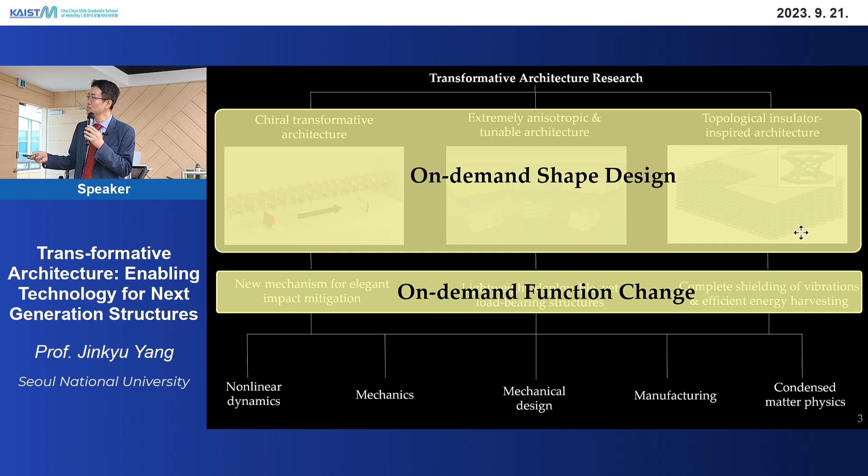But all these topics are based on on-demand shape design, which is connected to on-demand function changes. For that, I'm going to use different disciplines, for example nonlinear dynamics, mechanics, etc. So the first topic will be about a structure where I'm going to leverage nonlinear dynamics.

Impact mitigation is a very important subject in aerospace engineering and other engineering fields. This is a video of Falcon 9 from SpaceX, known for its reusable rocket motor - it can be used again and again. But when it's being landed, we have to make sure the structure is safely guarded, otherwise this can be catastrophic. So when it's landing we have to make sure it's safe.

If you think about a typical landing structure, when it touches the ground there will be a large amount of impact applied at the bottom. So people typically do use, for example, this type of metallic foam, which is inserted so that when impact comes in, we minimize the energy transmitted to the main body. This is the typical approach.

But using transformative architecture, especially leveraging nonlinear wave dynamics, I'm wondering if we can convert this impact into tension. That means if this structure is landing on the ground, instead of compression transmitted to the main body, it will be tension. Can you picture that? For instance, if you're wearing a helmet with this capability, when something hits the surface, instead of the inner part pressing your skin, it will basically pull your skin - meaning you won't feel any impact. So this conversion of compression to tension - is it possible?

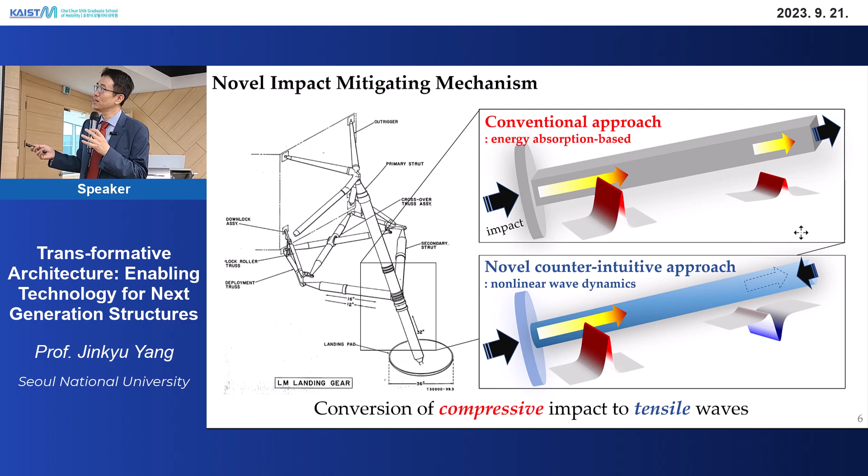It sounds a bit counterintuitive, right? Can it really happen? So I'm going to explain the prototyping process and the actual phenomena, then I will return to the physics behind it, okay?

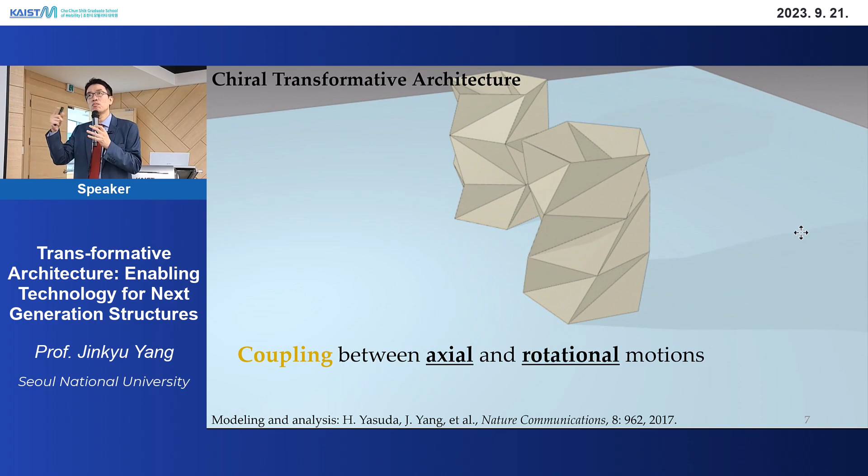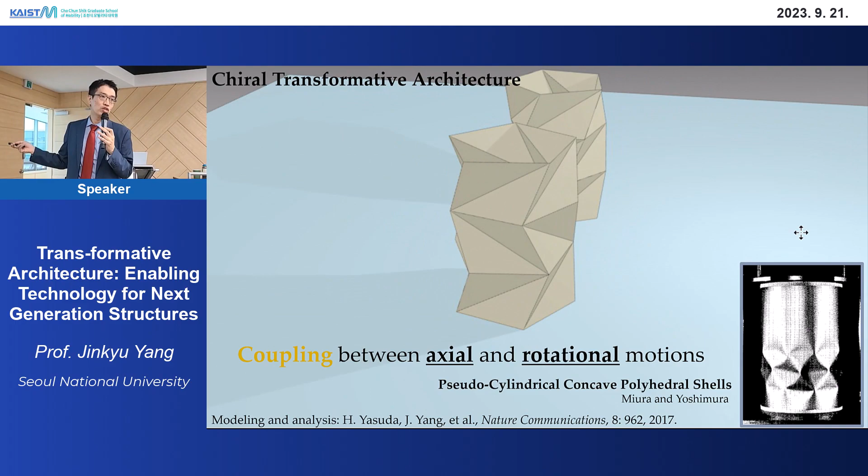For this purpose, I used chiral transformative architecture. This is like an origami structure which, under compression, has coupled motion of compression and twisting. This type of pattern can be easily found, for example, when you have a very thin-walled cylindrical structure. If you are buckling it, you have basically triangular shapes on the surface, but if you are compressing and twisting it at the same time, you get this type of chiral architecture.

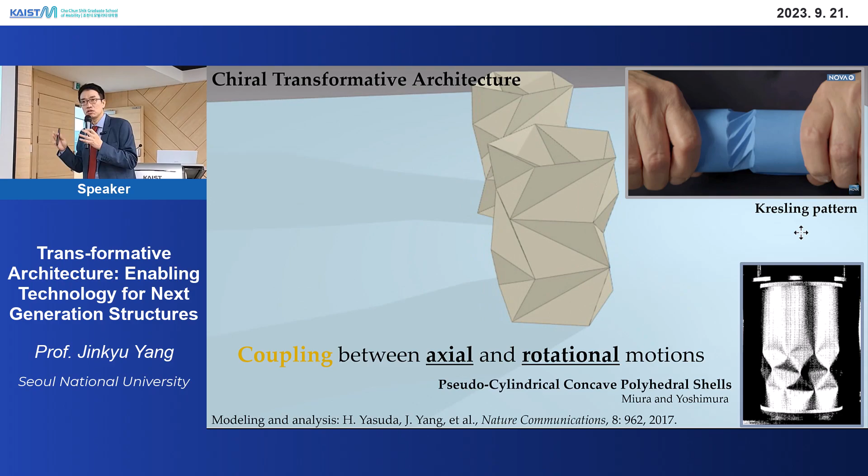Analysis on this can be a bit complicated, which you can look up in references including this, but in this presentation I will just talk about the phenomena, okay?

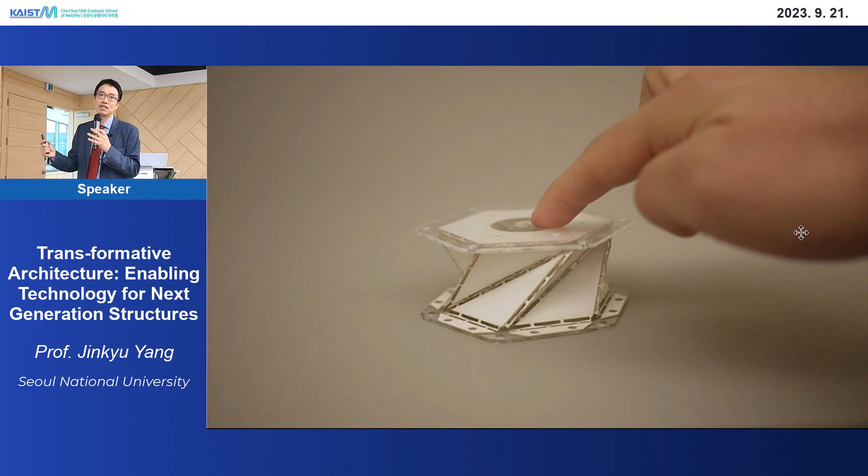To fabricate this, we use a laser cutter and basically fabricate a single unit cell, which is elastic. Under compression, it also has rotational motion. What we do is connect it into a single chain. We have 20 cells.

On the left-hand side of the structure, we have a very strong vibration shaker. We apply a high voltage signal, and it basically applies a strong impulse to this system.

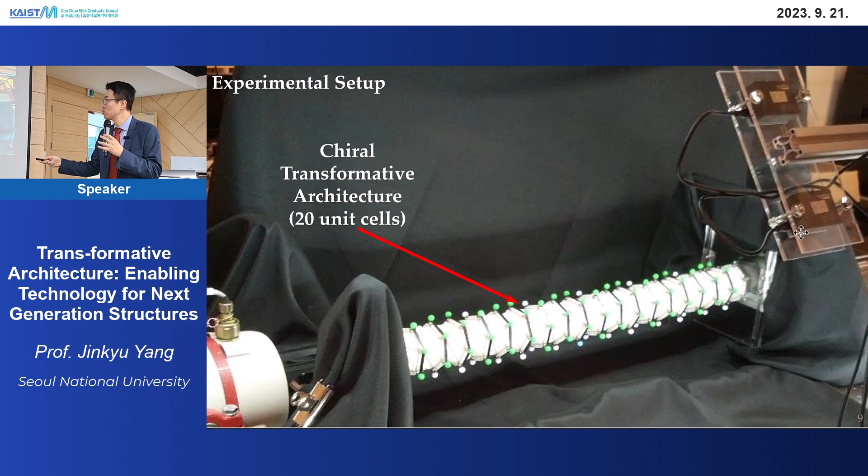We have 6 GoPro cameras. If we have 2 cameras looking at one object, we can get a 3-dimensional coordinate of the object, so each pair is measuring the dynamics of 1/3 of the structure. These balls are basically for keeping track of the motion of this structure.

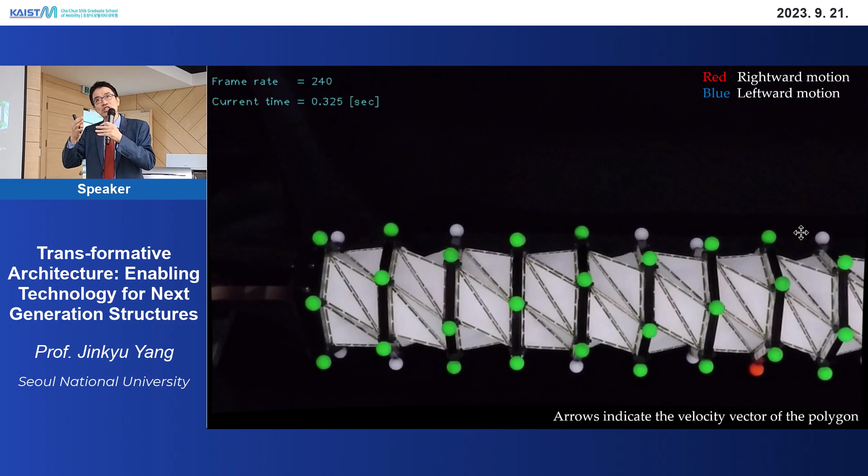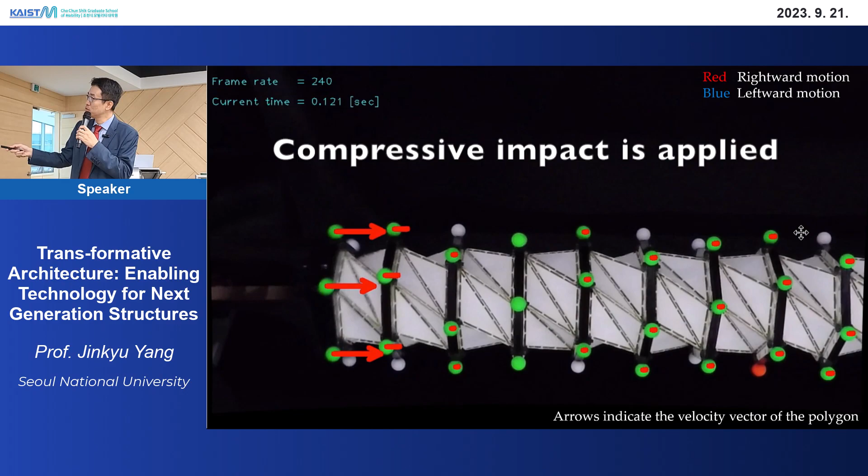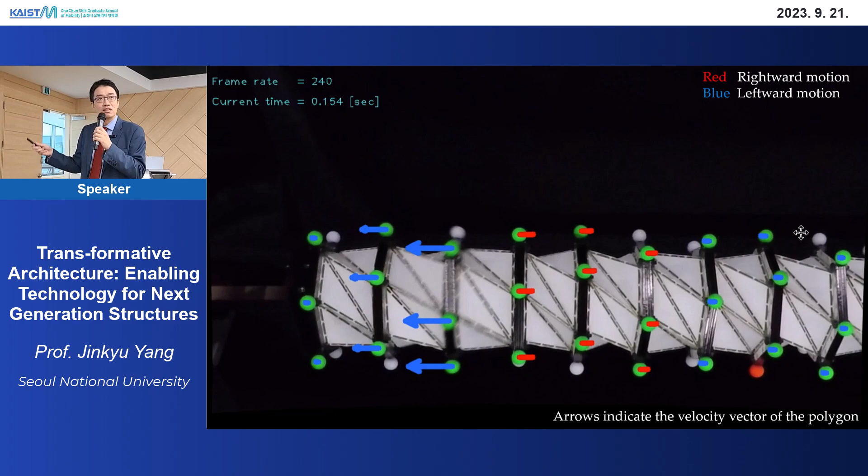Any elastic structure under deformation tends to bounce back, right? So it's compressed at the beginning, but it tends to bounce back. That's why we have these blue arrows generated. But interestingly, red arrows disappear very quickly, while blue arrows are transmitted in a more robust way.

This is an animation based on experiments. This is not just simulation, but experimental results. So what's happening is, again...

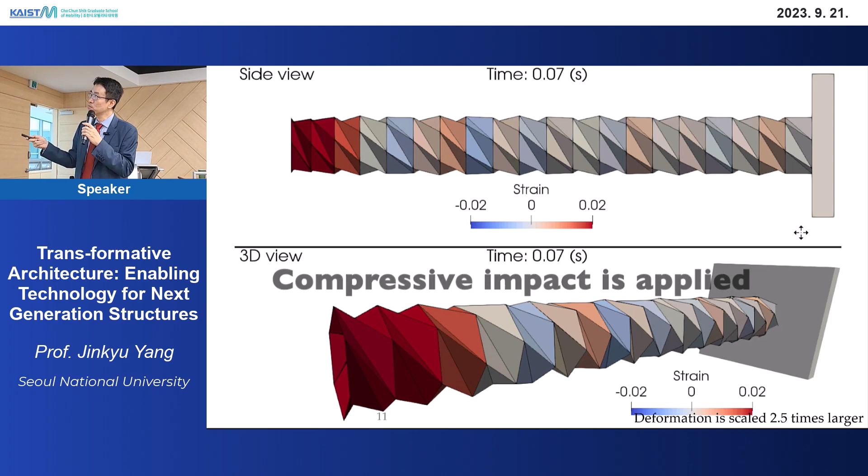Red color is compression. When the impact comes in, this is compressed, so the impulse is transmitted, but due to the reaction, we have blue color following. What happens is the speed of the blue color is faster than the red color. So at the end of the structure, please watch carefully which color arrives first.

Is it red or blue? It's predominantly blue color, right? That means even if you've applied impact on the left-hand side, what you feel from the right-hand side is not the compression, but the tension.

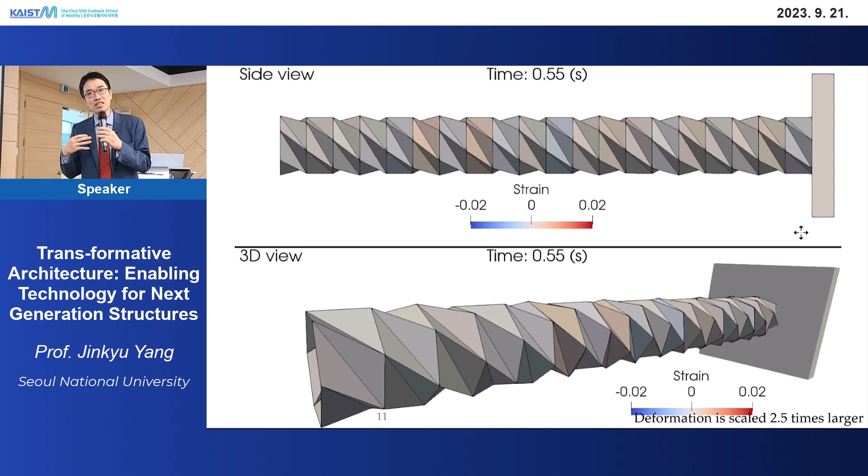But the blue color is propagating in a very robust way. So at the end of the structure, you feel blue, not red. This is the so-called rarefaction solitary wave, and this is based on the overtaking of this blue color wave over the red one.

So at the beginning of the presentation, I said I'm going to convert compression to tension, but what's happening is actually compression is still there, but made dispersed, spread out. But the blue color - we are going to make the blue color propagate robustly, okay?

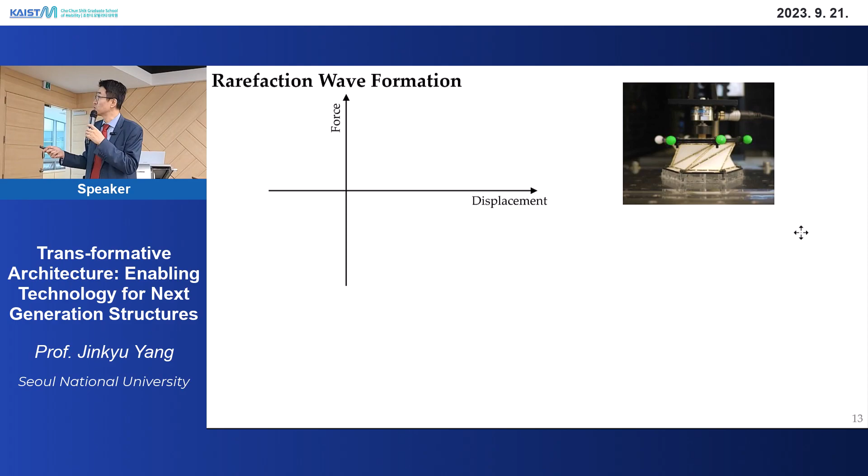So the physics is fairly simple. Let me explain this using a very simple explanation. Under compression of this single unit cell, we have a force-displacement curve, but this is not linear - it's nonlinear. The slope of the force-displacement curve represents the stiffness of the structure. At the beginning of compression it's fairly difficult to compress, but as you compress more and more, the slope goes down and down, so it gets softer and softer. This is nonlinear material.

So what happens is, typically stiff material tends to propagate waves faster, while soft material has a slower wave propagation speed. So if you have this type of impulse with the low amplitude part, and the high amplitude part having a low slope, that means it's propagating slow.

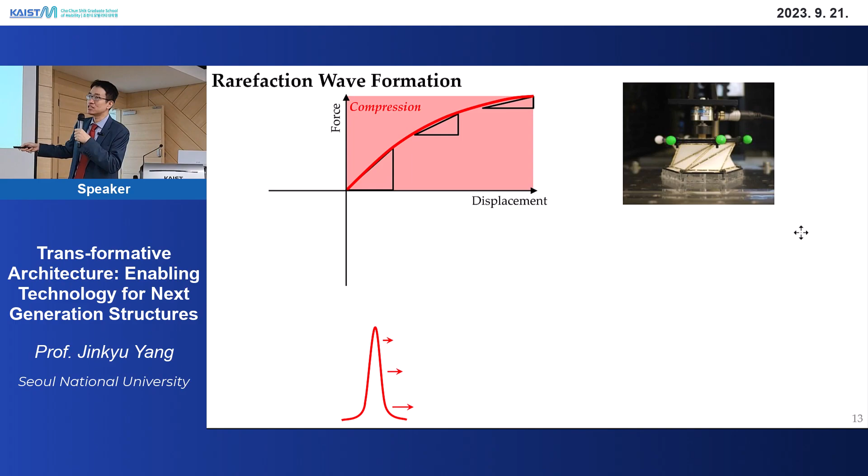Low magnitude part is having high slope, which is making waves propagate faster. So as it propagates along the chain, the system gets dispersed. So this is an efficient way to disperse waves.

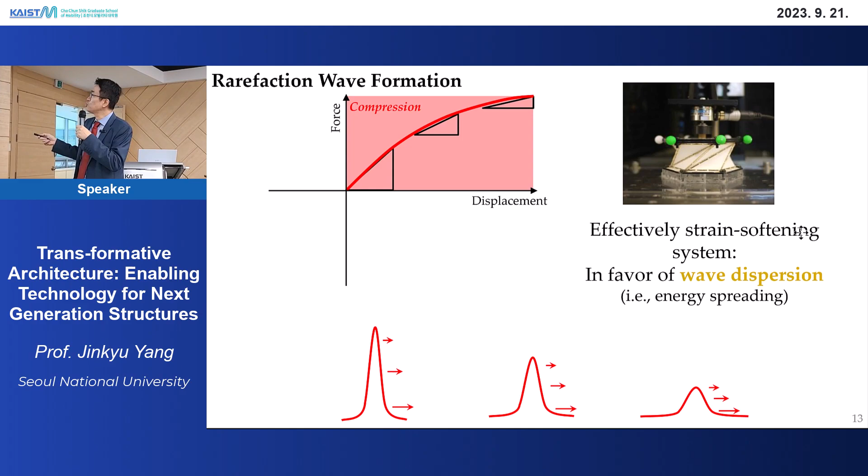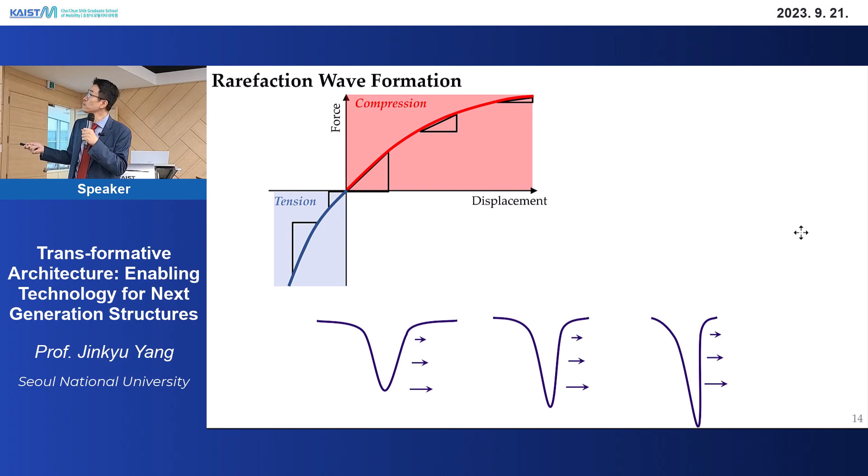But if you think about the other domain, which is tension, this is the opposite. At the beginning, low tension means low stiffness. But if you have higher tension, stiffness goes up, making the wave propagate faster. This helps waves build up to create shock type nonlinear waves, helping wave localization.

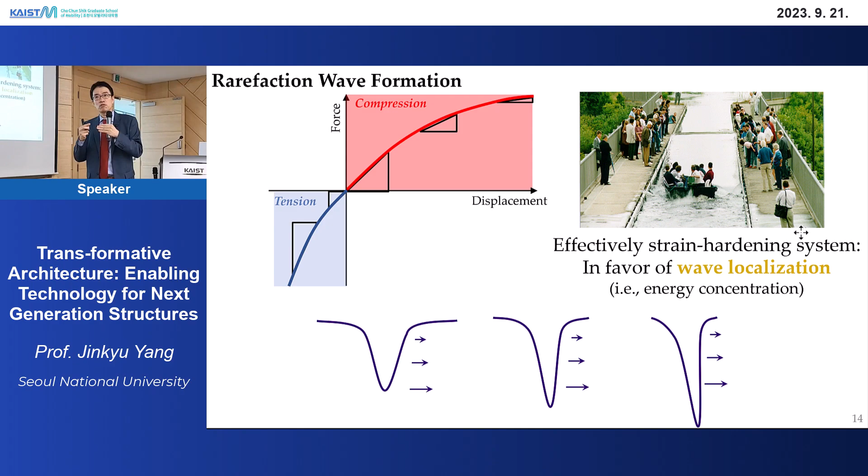And this happens a lot in fluids. In fluids, you see nonlinear waves, like solitary waves, a single pulse wave propagating very robustly. But you also have, for example, tsunami type waves. This happens a lot in fluids because fluids are nonlinear, but typically in solids we only use the stress-strain curve in a very small domain.

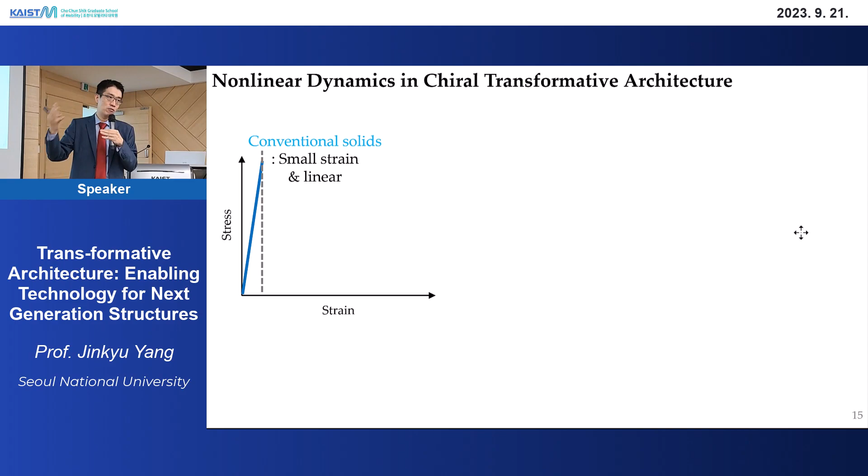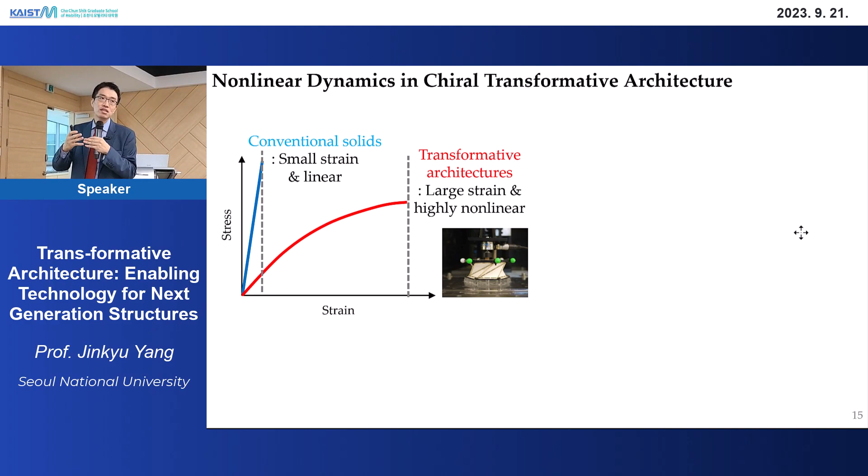Typically, Young's modulus is good enough to explain most wave phenomena. But this is origami - we are leveraging the full domain of strain, which is nonlinear, so we can leverage the nonlinearity of the structure. Just like nonlinearity is used to create nonlinear waves in fluids, this is structure, but we can still create nonlinear waves because of this soft nature. So we can also derive equations very similar to classical wave theory equations, the so-called KdV equation.

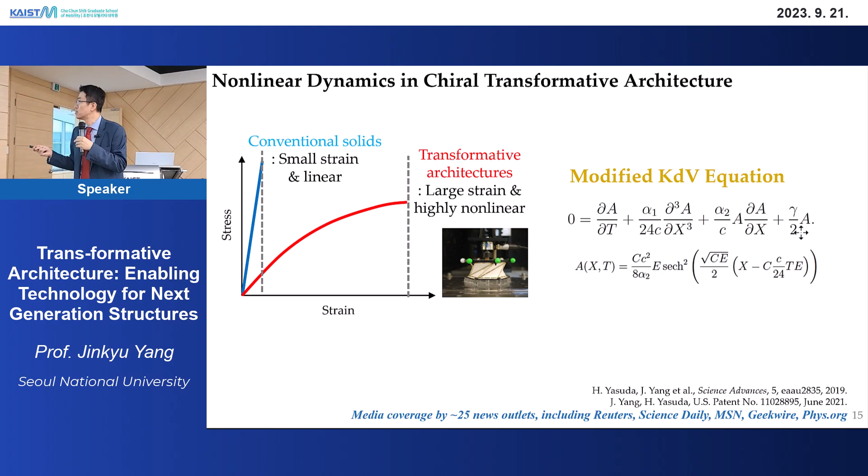This is the KdV solution. So this is what we did with the transformative architecture as the first part. We used it to enable a soft structure. In that soft structure, we created nonlinear waves. That was our first part.

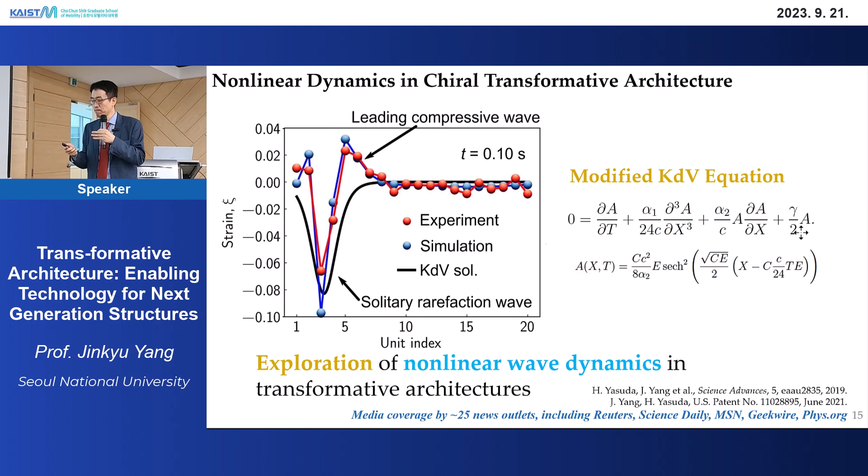But this way, by making composites in an origami way, we can make it pseudo-ductile, which means under impact, the structure collapses layer by layer, so it can absorb a lot of energy. Second, we can also use filament winding, which makes it less expensive to fabricate.

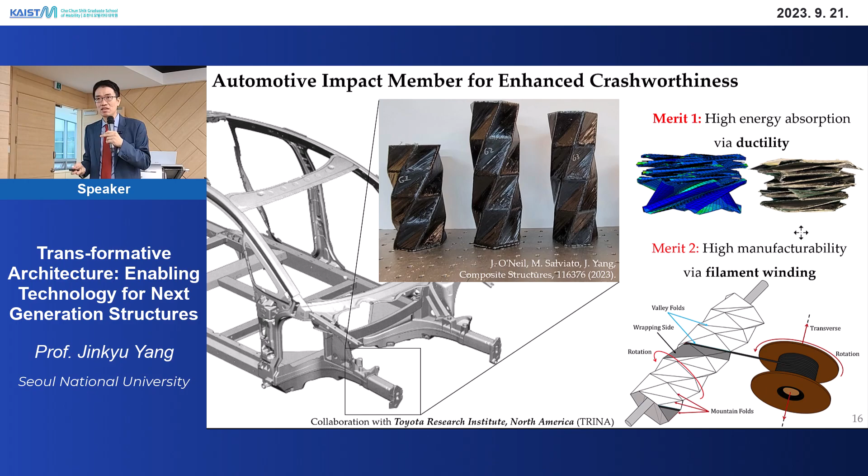So this is a video clip that shows impact of origami. As you see, the structure collapses layer by layer. This way energy absorption can be improved.

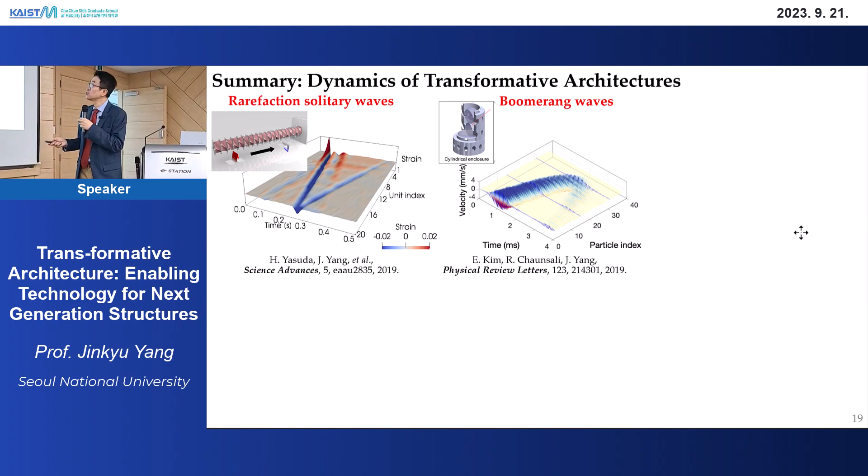All right, that was my first part of the talk. Summarizing, I've shown rarefaction waves, and likewise we can also make waves turn around like a boomerang. You impact on one side, and not even before reaching the end of the structure, we can make it turn around - that's also by using nonlinear structures and nonlinear wave dynamics. We can also make 3D printed lattices, and this enables you to create many different types of waves.

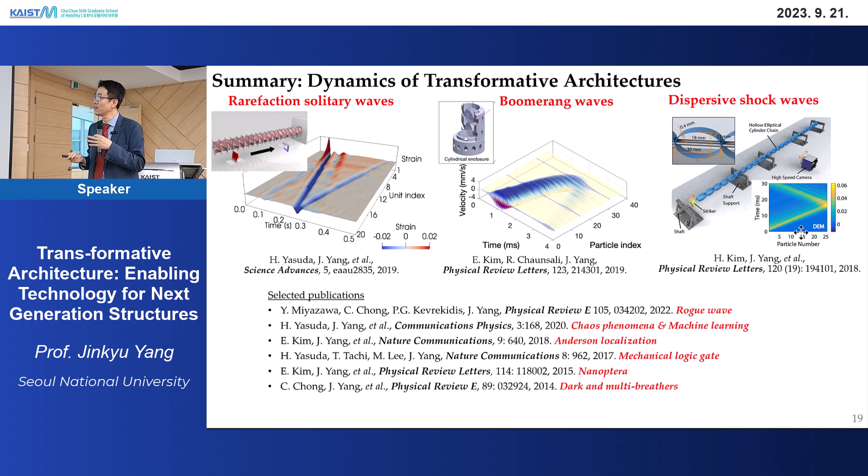All right, so let me move on to the second part, which is anisotropic and tunable architecture for making lightweight, deployable, yet load-bearing structures. So I said three different properties: lightweight, deployable, yet load-bearing. Typically, to make lightweight and deployable structures, the structure needs to be very compliant, very easy to be folded.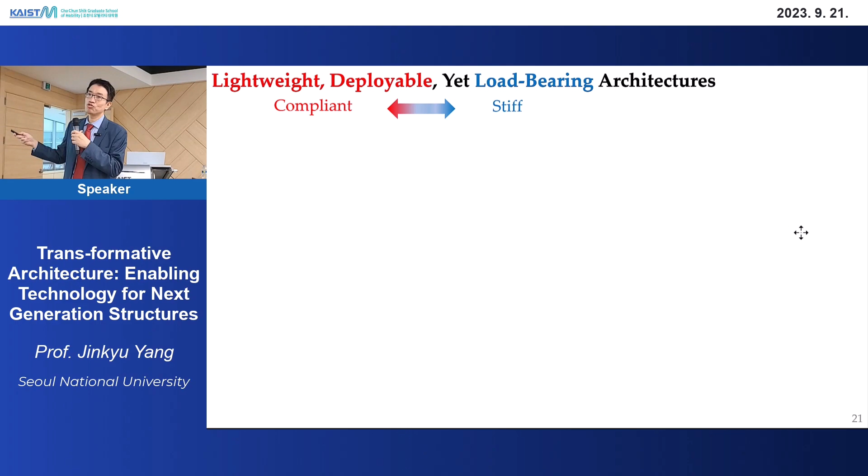But if this structure needs to be load-bearing, the structure needs to be stiff. So we are talking about two different contradicting properties. But this is important in many cases.

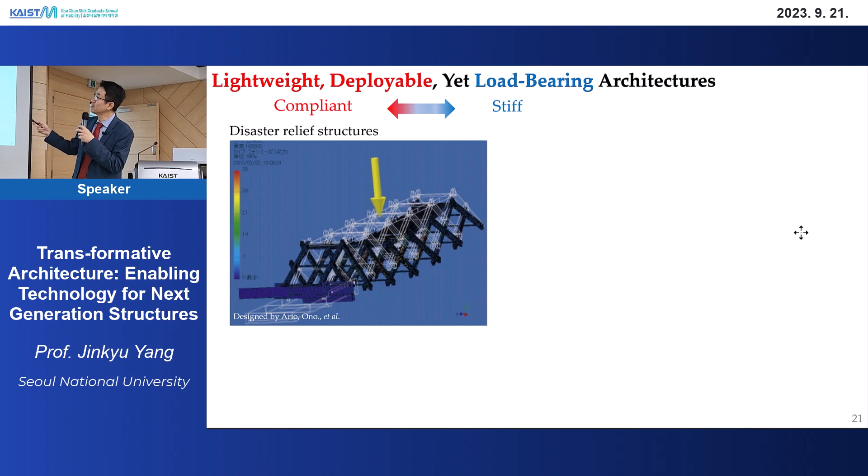For example, when you have disaster relief structures, typically this structure needs to be stored in a compact manner. Under the disaster situation, it needs to be deployed. So this type of structure needs to fulfill these properties. Likewise, when you build a space habitat, you launch the structure in a compact manner, and on a different planet or elsewhere, it needs to be deployed. After deployment, the structure needs to be stiff and strong.

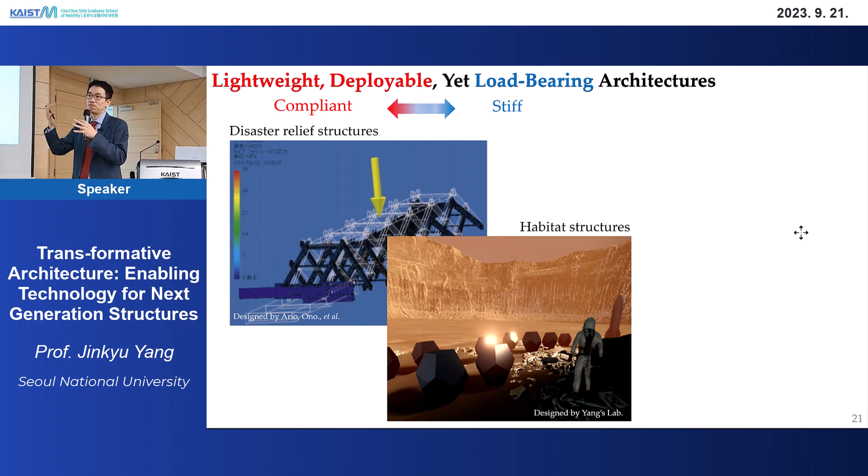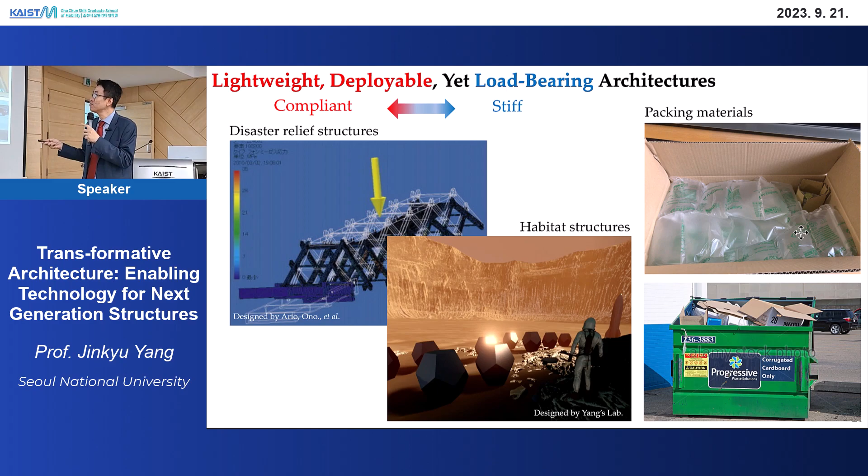Likewise, in your daily lives, packing materials like this need to be folded - stored in a compact manner. At the same time, these boxes need to protect materials, items inside. So there are many cases where you have to fulfill all these requirements.

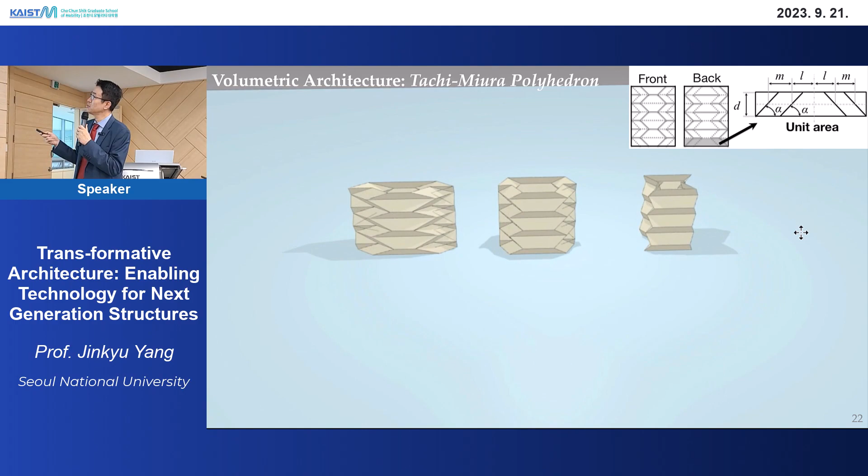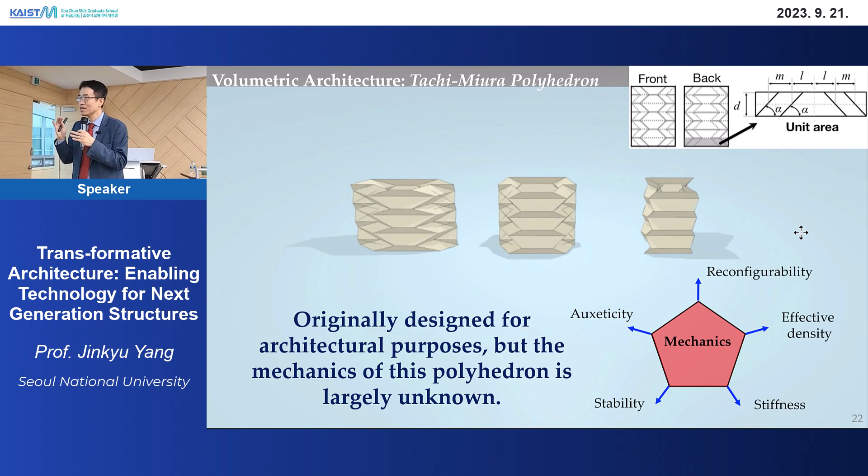So how can we do that? We are proposing origami, particularly something called Tachi-Miura polyhedron. This is just a combination of two different sheets of paper, but this structure has different Poisson ratios, different stability, different stiffness—a lot of different properties that you can actually tailor.

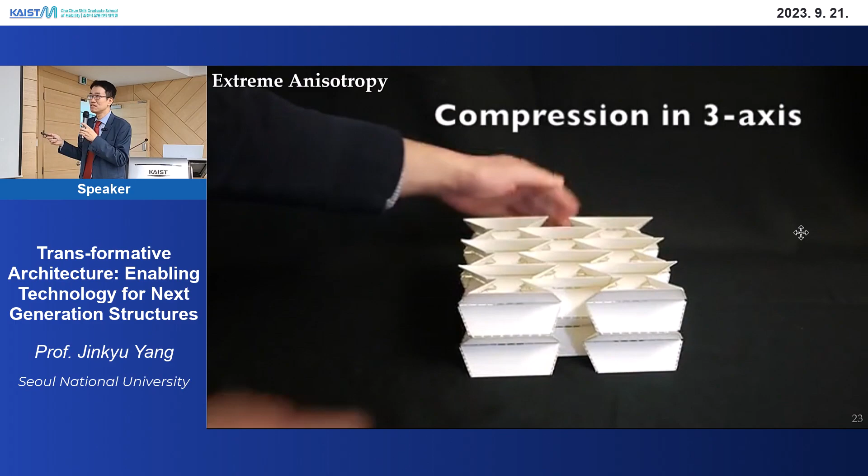I'm not going to get into detail, but mechanics of origami is a very interesting part of the mechanics subject. In this case, I can make this into tessellation, which means multiple cell structure. You see that this is easily compressed, but at a certain direction it can take the load. But even in that certain direction, I'll show you what happens—if you slightly change the initial condition, this structure can become collapsible.

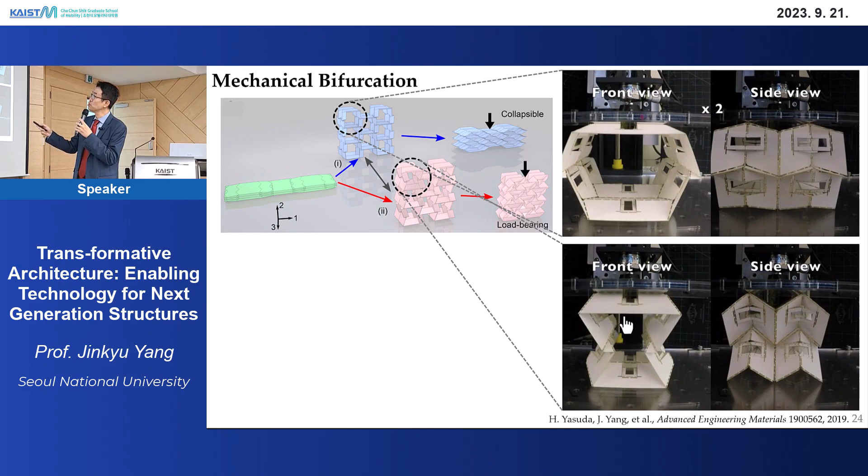Let me play the video. So one structure is easily collapsible, the other structure is load bearing. But I'm talking about the same structure. Depending on its initial condition, whether this is concave or convex, one structure can be collapsible, the other can be load bearing. In terms of force displacement behavior, it's quite different. When we measure the force this structure can handle, it can be very low in this configuration, but when converted to the other configuration, the load it can carry is very high. Very simple principle, but by using this, we can make the structure easily foldable while still able to take the load.

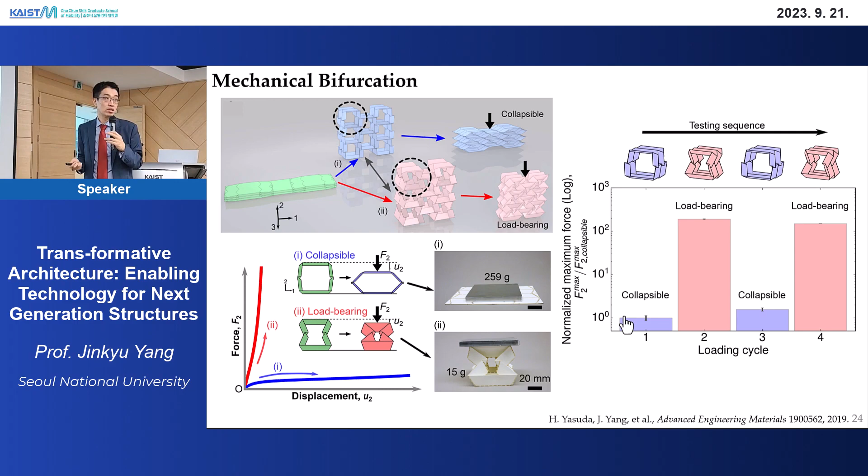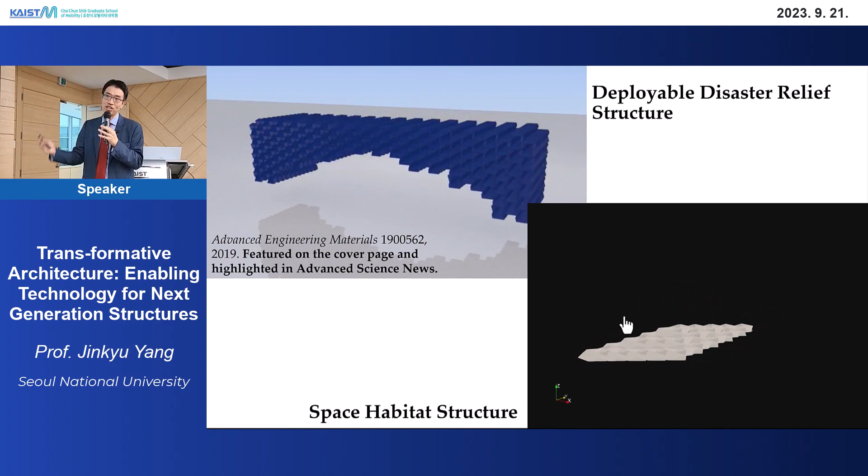Nothing complicated. So using that, we can build disaster relief structures like this. This is based on Tachi-Miura polyhedron. We can potentially make this into a space habitat or different architecture.

Again, this can be made into tessellation. This one has many different properties that you can dial in and tailor. Depending on what you need, you can have specific Poisson ratio, specific density, specific stability that you want. So origami gives you a lot of design freedom.

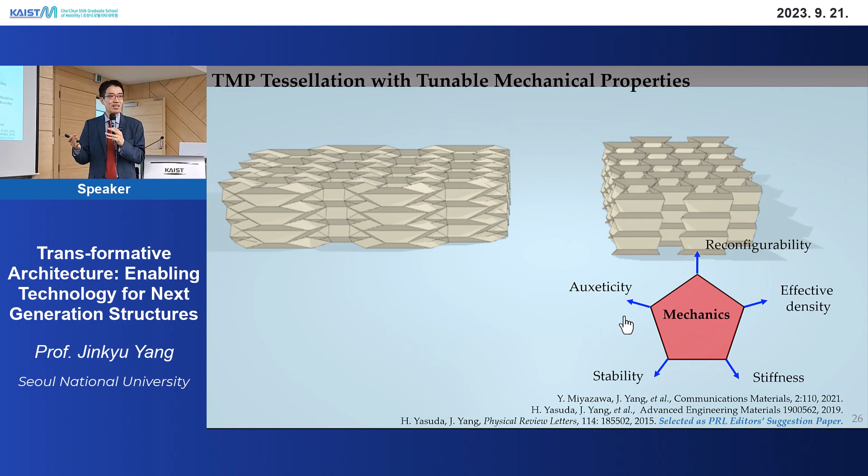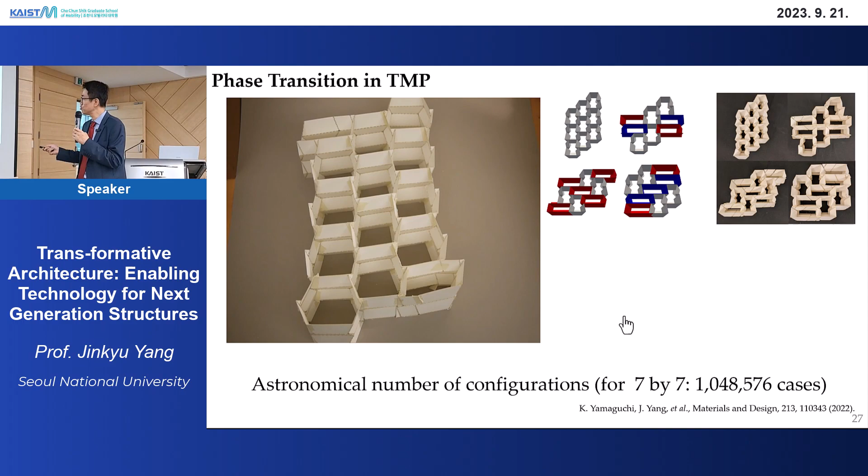Another interesting property is that this structure can be reconfigurable. The whole structure can be made into many different shapes. For example, with 3x3 cells, we can make it into many different geometries. If you have 7x7 cells, it enables you to achieve about 1,000,000 cases. But it's interesting how you can actually calculate all those cases—this is computationally a very interesting problem.

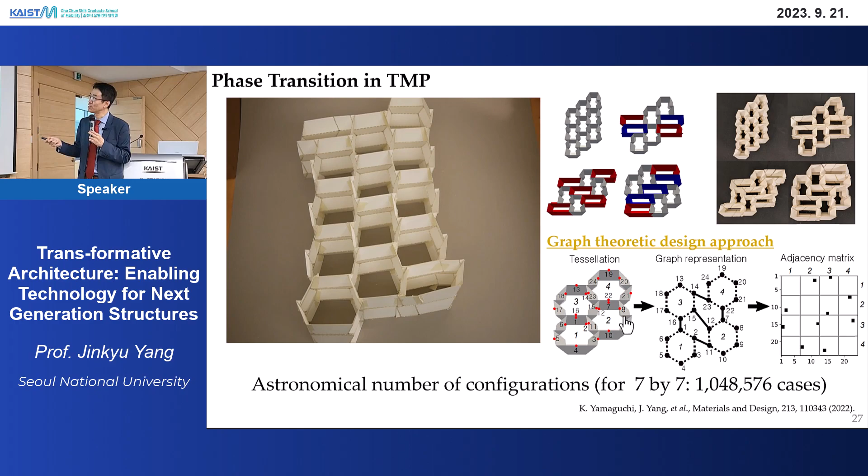So we have used graph theory, which is a tool that many different fields use, including mathematics and computer science. Using this, we can calculate how many cases are possible using this tessellation. Another way we can leverage this is a 3x3 cell structure, which can be converted into many different geometries. This is only showing 4 different cases, but each has a different geometry.

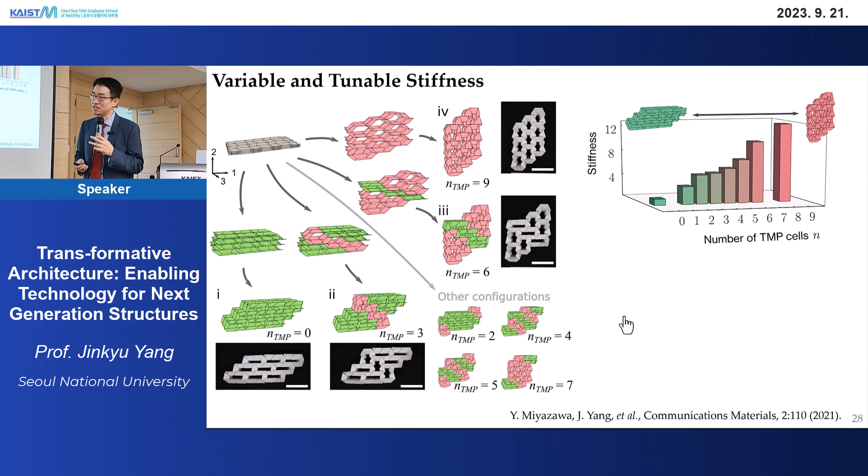For example, this one has 9 square shapes. This one has 6 square shapes and 3 rectangular shapes. Depending on that, this structure will have different stiffness when compressed from the top. So that enables you to have different stiffness, which means this origami system can give you a variable stiffness system. Likewise, the entropy of this structure also changes.

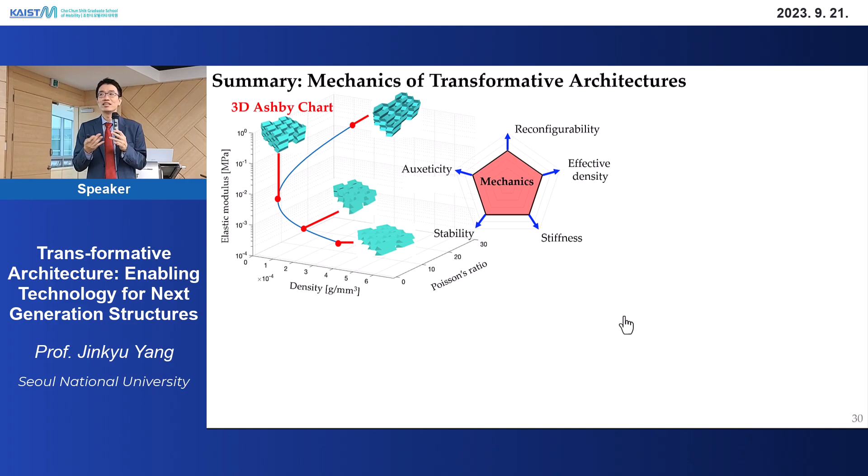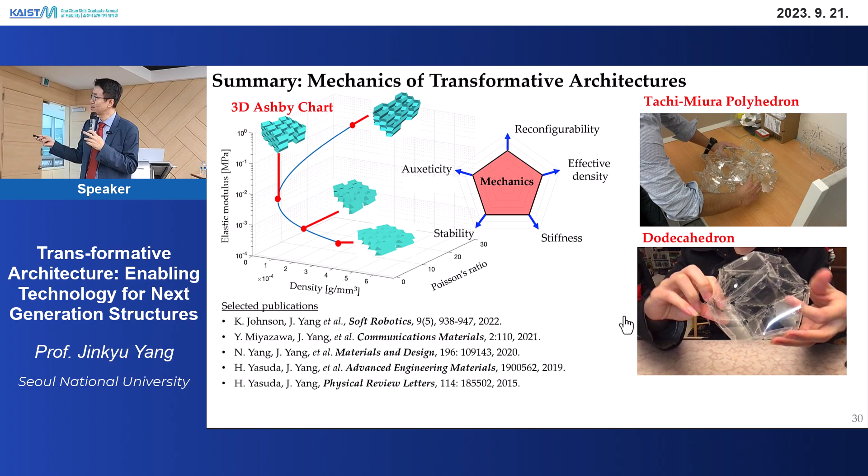Summarizing what I've presented in the second part: origami can give you an interesting design tool that enables you to change material properties—in this case, Poisson's ratio, density, and modulus. We can build it into a prototype, and here is another example, a dodecahedron, which can be deployed into this interesting polyhedron. I'll talk about this a bit more at the end of the presentation, but again, this is an interesting design tool that you can use.

All right, so let me move to the last part, which is topological insulator. How many of you guys have heard of topological insulator?

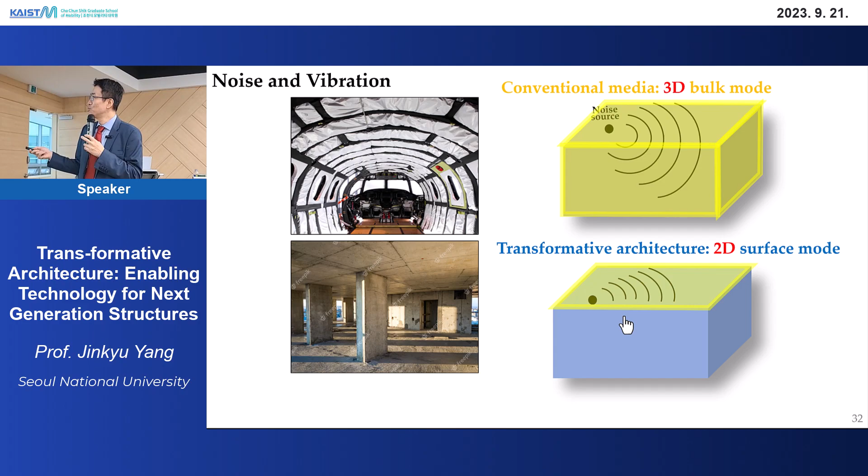In a typical structure, when there is a noise source, waves propagate everywhere. But if you have a new type of structure with the source of noise on the surface, what if the structure doesn't allow waves to penetrate inside? Then you can actually have a very quiet aircraft. You can have basically complete shielding of noise between floors, right?

That is possible if we borrow a concept from topological insulators, okay? So that breakthrough happened in condensed matter physics.

So topological insulator is a material which is insulating inside, conducting outside. What do I mean by that? Typically, you think about an insulator as a material like rubber, right? It doesn't allow electrons to travel. If you think about a conductor, you think about metal, right? It has free electrons traveling everywhere. But a topological insulator is insulating inside, conducting outside. It's like chocolate - chocolate inside is insulator, outside is conducting, right?

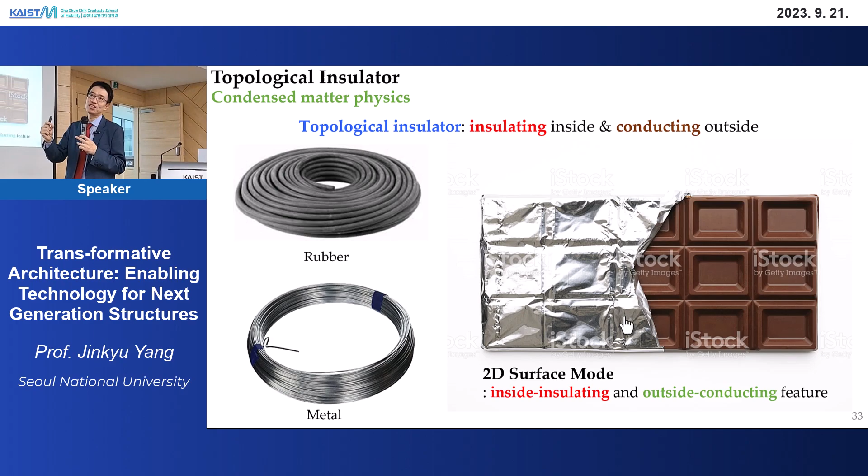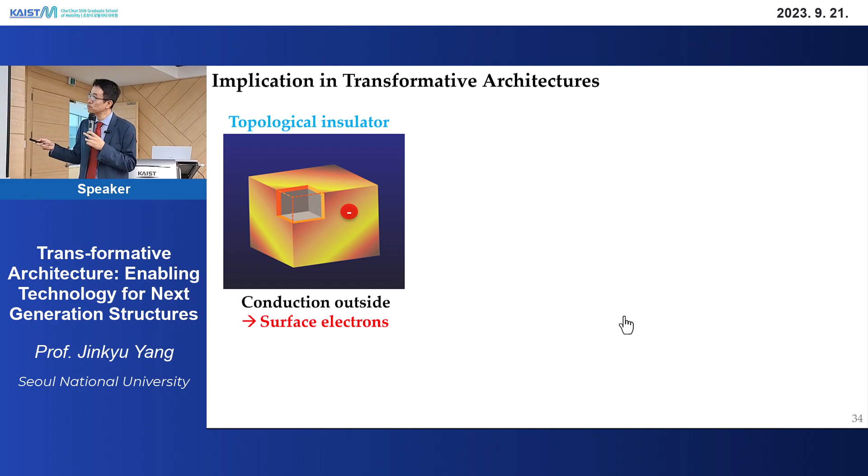The original topological insulator concept came from condensed matter physics. This is a 3-dimensional structure, but electrons only propagate and travel outside of the structure, which has been realized in photonics as well - only light waves propagate outside of the structure. Also in acoustics, this is a 3D printed lattice. If there is sound created in one part of the structure, sound only travels outside.

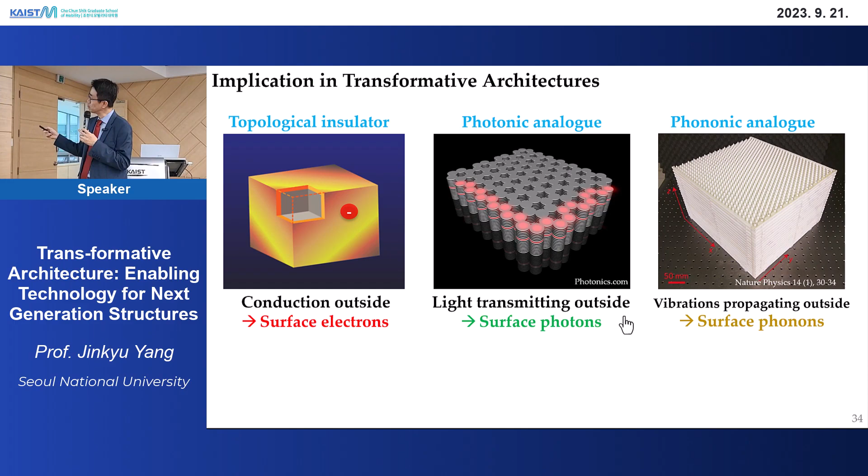But there hasn't been much work on stress waves. All right, so that's the part that I would like to address. So this is a lattice that my team has built and simulated.

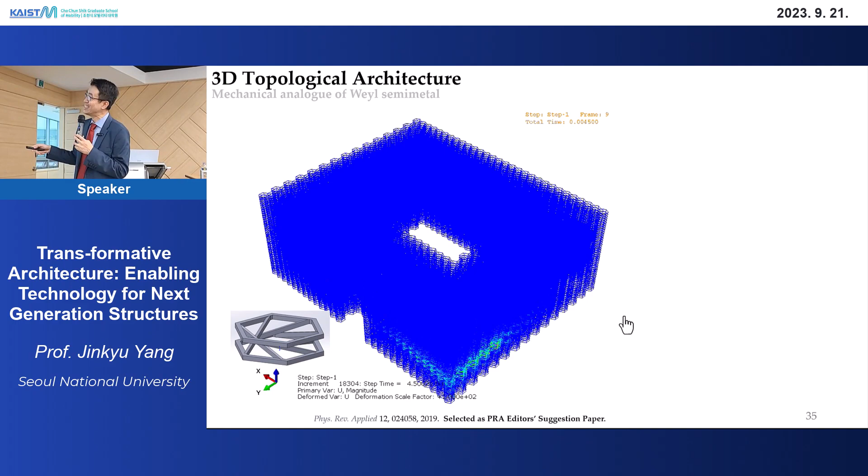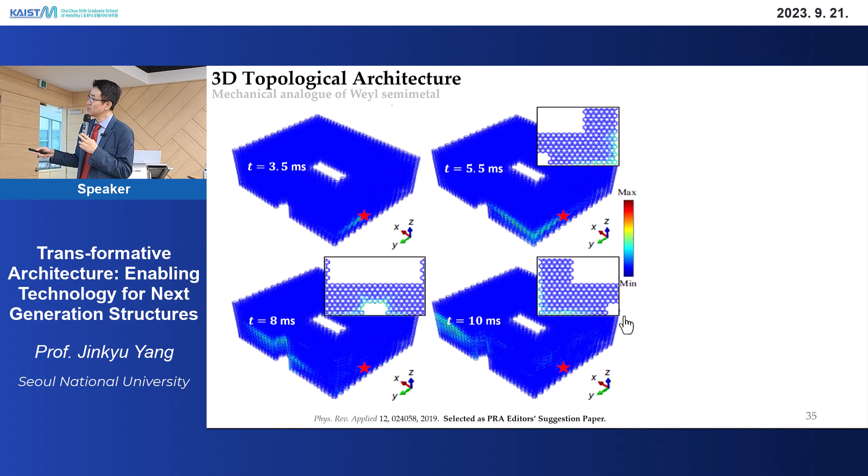So if this is possible, as I mentioned, there are a lot of applications - automotive vehicles, where there is noise outside, we can make sure that noise doesn't get into the cabin. And for high precision electronic equipment, vibrations coming from outside can actually be isolated.

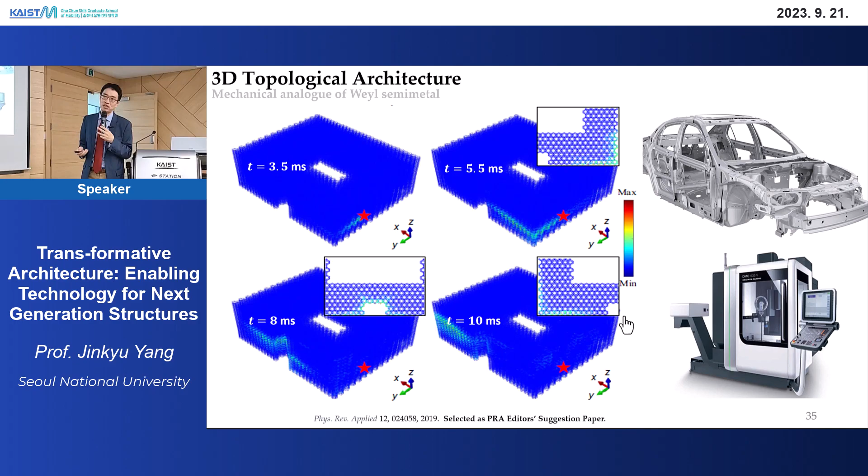So the question is, this is a 3D case, but my team started with a lower dimension. This is a 3D structure with only surface waves, which are 2D waves on the surface. A similar concept is basically a 2D structure, which is a plate structure, where we guide waves just along a line, which is 1D. So this topological wave is basically lowering the energy dimension by one.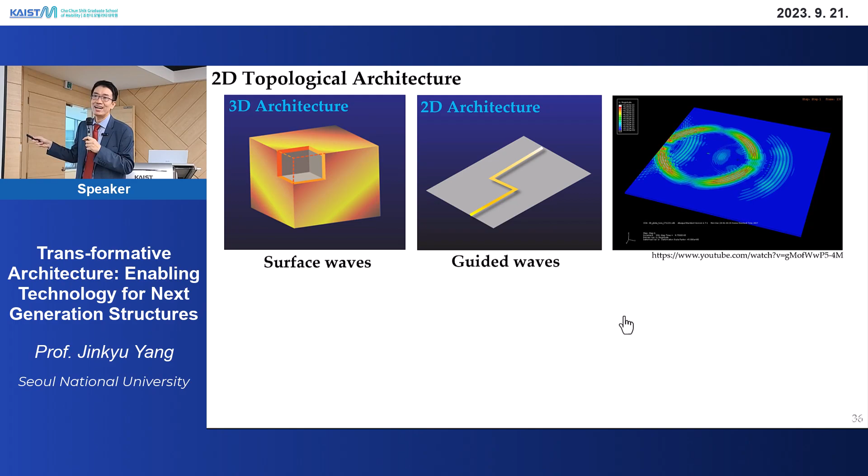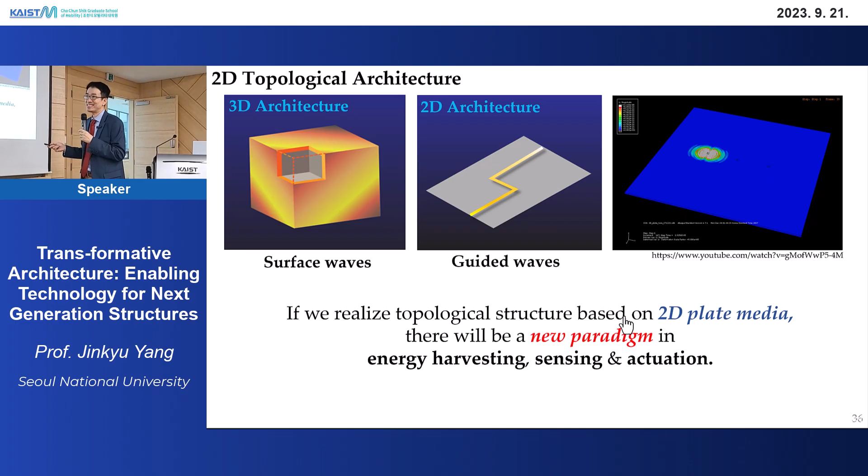If you think about typical waves in a 2D structure, if you have a wave source here, waves propagate everywhere. This type of wave propagation along a certain waveguide is very difficult to achieve. If we can guide waves in this specific manner, then we can have a new paradigm in energy harvesting, sensing, and actuation. So what we have done is have a couple of students work on mounting bolts on a plate.

I will show you how we fabricate it, and I will show the physics and physical phenomena later. So, how many bolts do you think these students have mounted?

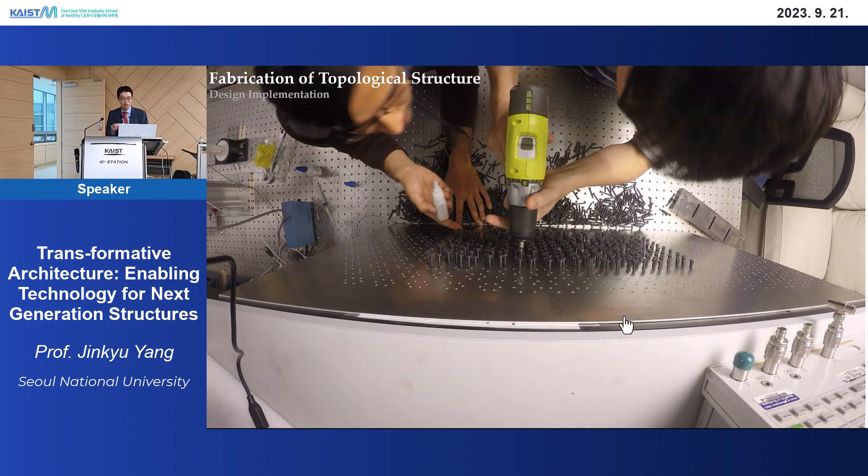Very good. So at first they mounted all the bolts, but the bolts were actually rattling, not firmly mounted. So they removed all the bolts. If I play one more time, you'll see one student drilling the bolt and one student dropping super glue to make sure the bolt is firmly attached to the plate. It took them a whole week.

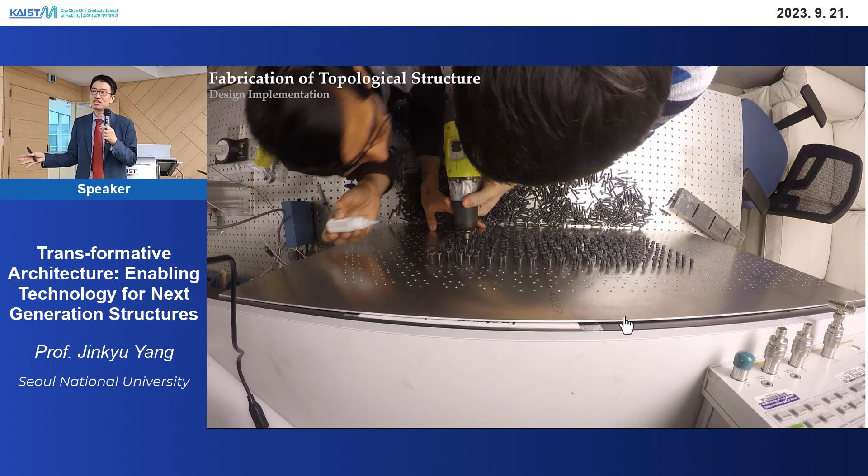So they said they're not going to do this, make another plate, but later you'll see they actually created another plate. I'll show you later, okay?

Interestingly, the waves propagate only along this domain boundary. Another interesting thing is there is spin. Electrons have spin, right? Electrons have spin nature, so electrons can actually propagate along a certain path.

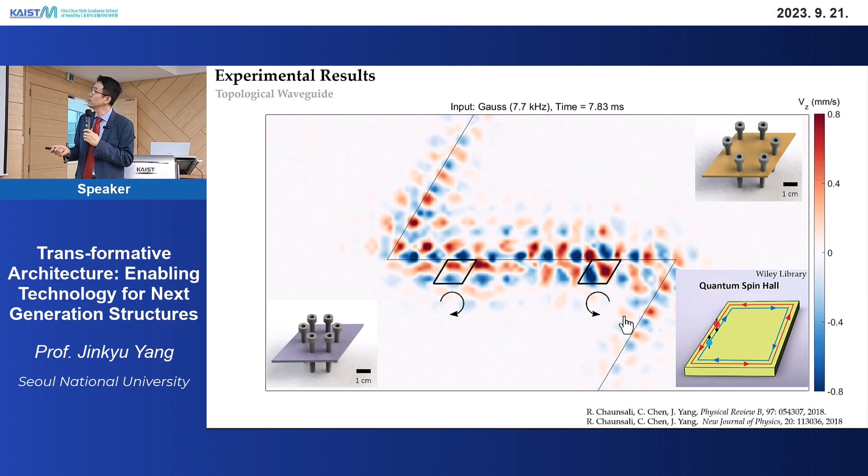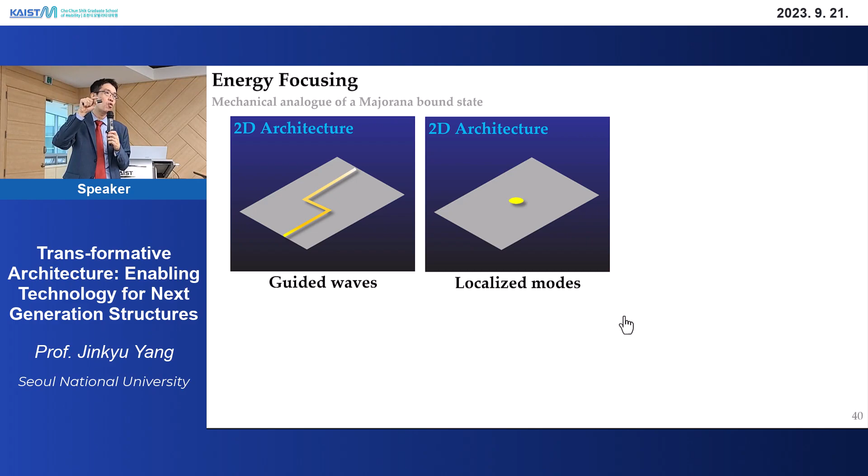So what I've just shown is a 1D wave in a 2D structure. But this topological insulator concept goes even further—you can make the waves localized in one spot, which is 0D. 2D structure, 1D wave, and this is a 0D wave. A zero-dimensional wave is just one point in a structure. Can we make waves just be focused in one point in a structure? Can you do that?

This is another plate that my students have fabricated. It's different from what you saw before, with not as many bolts—this is 800 bolts or so. But this is interesting because this structure always makes waves be focused at the middle of the structure.

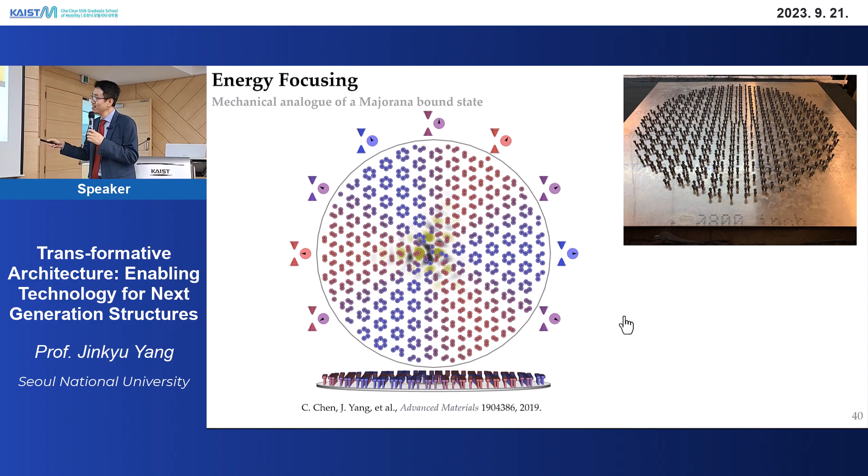Even if you excite the structure away from the center, at the end, the waves just migrate to this point. This is an experimental result—we had a piezoelectric actuator, we injected waves away from the center, but after we turned the piezoelectric actuator off, the wave actually moved to this point.

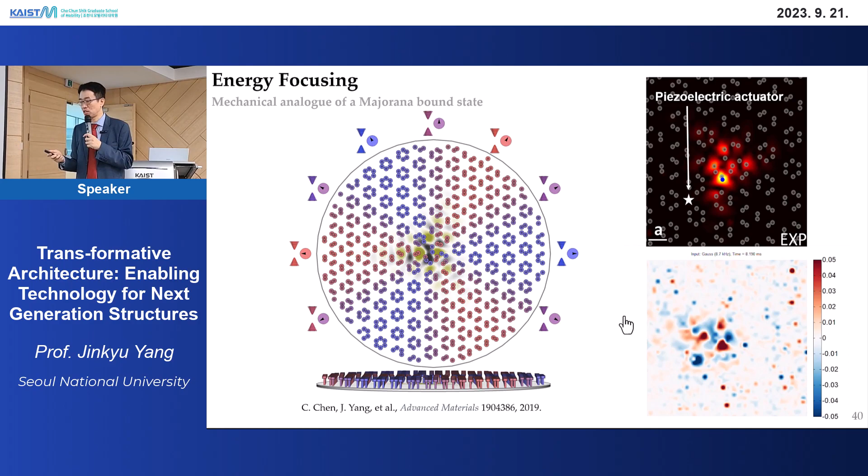So this is also something that we didn't see before. If you have, for example, an energy harvesting structure, vibration is all around, but you cannot really attach a transducer all around. So if you have a transducer attached at a certain point, then let the waves all come to that point, we can harvest that energy very efficiently. So this is one way that we can use this type of structure.

So again, the first example that I've shown you is guiding waves in a 1D manner.

Another way is we can also let this wave choose one corner over the other. And the last example I've shown is in the plate, even if there is excitation away, we can make the energy focused at a certain point. So this is my last part, about topological manipulation of energy in solids and structures.

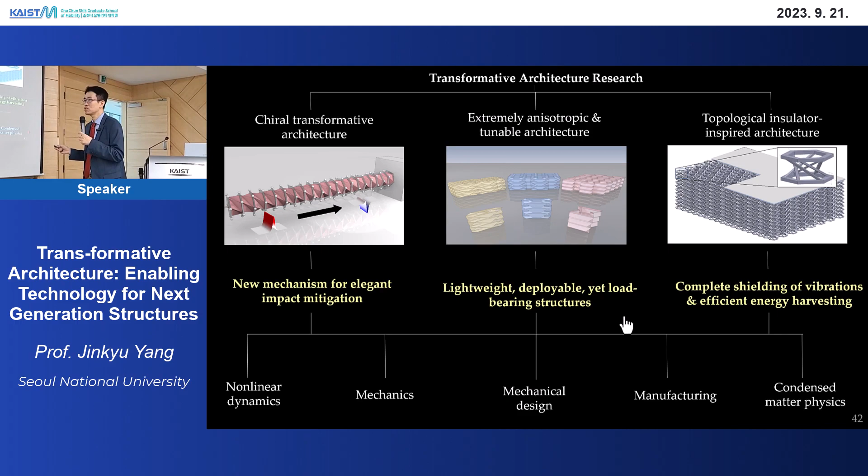All right, let me wrap up my talk. I proposed a structure called transformative architecture, which is a bit different from conventional structures we deal with in engineering. The first structure was about impact mitigation, converting compression to tension. The second structure is to build lightweight, deployable yet load-bearing structures. The last part was shielding vibrations and doing efficient energy harvesting. For that, I used nonlinear wave dynamics, mechanics, mechanical design, manufacturing, and also condensed matter physics.

So many interesting disciplines you can use for structural engineering. Now that I am in this transportation graduate school, I can also propose the usage of such structures for mobility. Can we use such structures for noise absorption? Even if there is noise and vibration outside, we can make a quiet structure by using these structures for the cabin, for the frame of the structure.

Likewise, landing of the structure - UAM's big issue is how to ensure safety of the passengers. People don't want to take the risk of riding UAM because what if it crashes? Safety is a very crucial issue for this type of structure. But recalling my first topic, converting compression to tension, we may have very safe structures. Even if there is a hard, crashy landing, this compression can be converted to tension. We can safely make the structure land even under very urgent situations.

Likewise, we can also make the structure foldable, reconfigurable, making UAM structures more compact. The wing can be folded, other structures can be folded. I haven't really introduced this in the presentation, but we can also come up with many interesting robotic algorithms and robotic mechanisms by using this transformative architecture.

All right, let me finish my talk with one animation that my students actually created. This is a dodecahedron-based space habitat, and you'll see that it's looking flat at the beginning, but it can actually be unfolded into this stable habitat structure. This is also another vision of mobility research - how do we actually move such structures to space elsewhere, make it deployed to form very stable structures. Okay, with this, let me finish my talk.

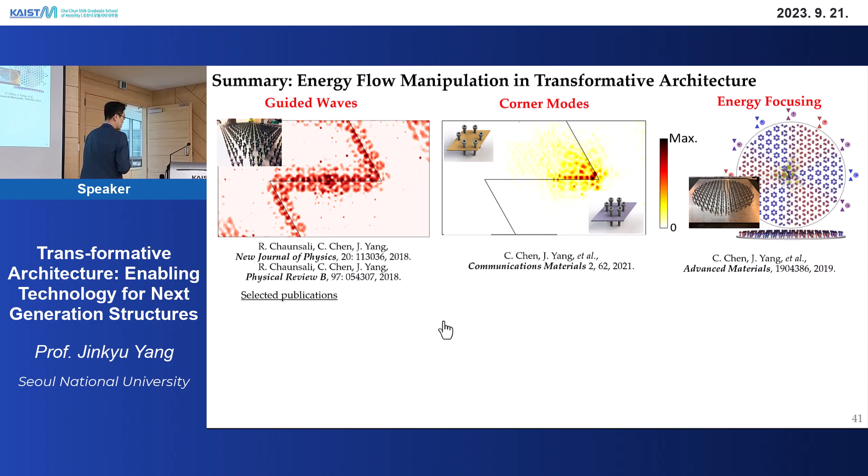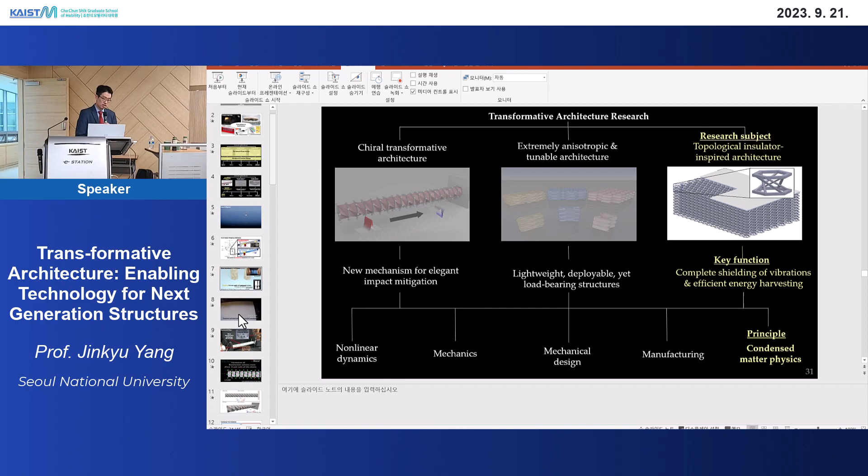So the question is, the mechanism of rarefaction wave generation - is it only possible for a structure with a certain number of unit cells?

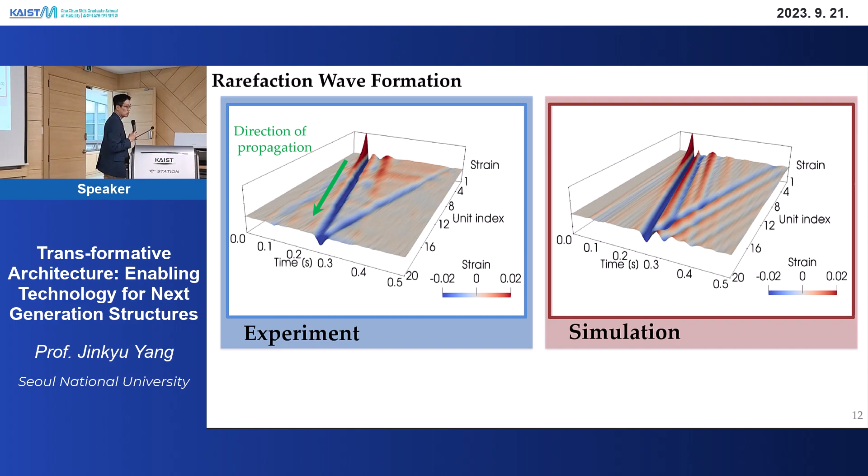That's another very good question. So the question is, for the origami structure, how are we going to deal with issues of fatigue, right?

Before we do this testing, we did a cyclic loading test - we repeated testing unit cell loading, unloading like hundreds of times, to make sure that hysteresis is minimal. Every time we do the testing, we have to ensure repetitive results. If not, the first time you do the testing, you get one wave shape, and if you do the testing next, you get a different wave shape - that's not good. So we conducted that cyclic testing to ensure this is giving us repetitive results.

But when it comes to making this into more rugged materials, we have to come up with different solutions - that's what my current team is working on. We have a plastic version of this which is working pretty well. What if we make it using, for example, composites or metals? That's a different issue. So that's another very good question.